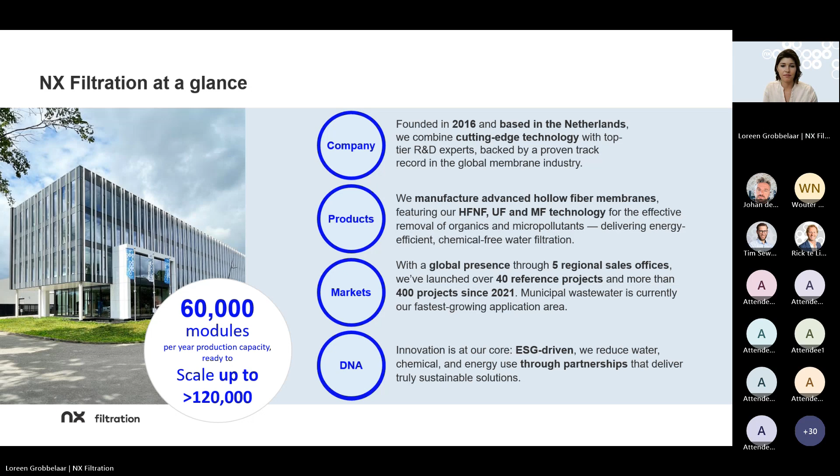Our product portfolio covers a broad range of hollow fiber membrane modules, including nanofiltration, ultrafiltration, and microfiltration. For this webinar, I'd like to highlight our ultrafiltration range, which is used in a wide range of applications, including RO pretreatment, potable water, and wastewater reuse.

Our ultrafiltration range includes the 150 kilodalton membrane, best for removal of small particles, bacteria, and viruses. We also have a tighter ultrafiltration membrane, the 10 kilodalton, best for colloidal silica removal. These membranes can replace some existing products currently in the market, but you'll hear more about this later from my colleague Rick.

Our nanofiltration membranes range between 400 and 800 Dalton molecular weight cutoff, and we operate these membranes between 12 and 35 LMH, dependent on the water source. These nanofiltration membranes are specifically designed to remove organics, color, and COD from the water, without the need for chemical dosing.

And finally, our microfiltration range is mostly used in the food and beverage industry and is ideally suited for high quality clarification of beverages, and is also used in the dairy and pharmaceutical industry.

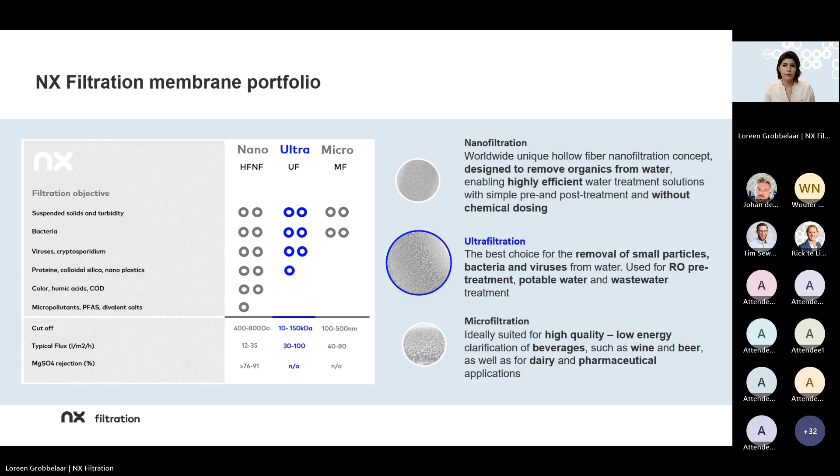Now that you've seen our product portfolio, you can see that we've served many projects globally with our ultrafiltration membranes, including presence in both municipal and industrial markets. This is where I'll hand over to my colleague Rick, who will tell you more about our ultrafiltration product portfolio and why you should consider replacing your membranes with NX Filtration ultrafiltration membranes.

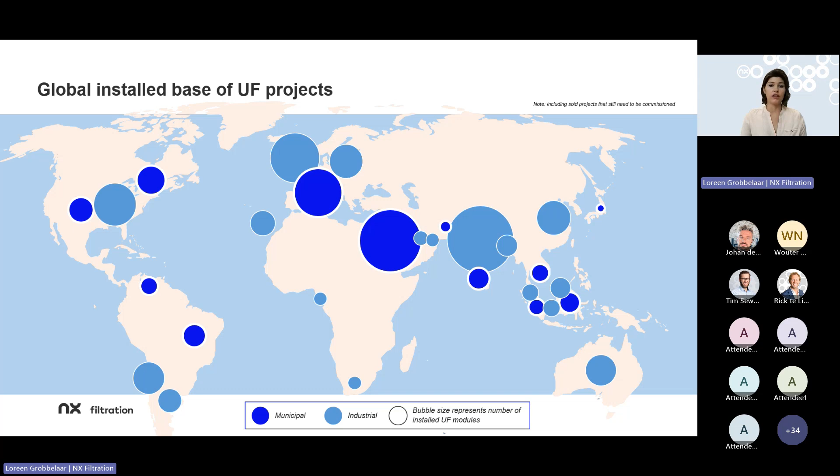Over to you, Rick. When customers start thinking about membrane replacement, it's rarely just because the old membranes have reached the end of their life. There are several strategic and operational drivers behind this decision, and it's important to understand them, especially when positioning our technology as a valuable upgrade. First, aging of the membranes, which results in performance degradation.

This is a common trigger: lower flux, more frequent cleaning cycles, or declining product quality. But more and more customers are focusing on operational cost drivers: high energy consumption, excessive chemical use, labor-intensive maintenance routines. In other words, increasing OPEX.

Then there's the regulatory and sustainability aspect. Customers are under growing pressure to meet stricter discharge limits or reduce their environmental footprint. In these cases, a membrane upgrade can contribute to ESG goals and avoid risk for regulatory and reputational exposure due

to the offering of future-proof PFAS-free membranes. Another key factor is better life cycle cost, in other words, process optimization. For example, upgrading membranes can allow for higher recovery, capacity expansion, or more stable operation under challenging feed conditions, all

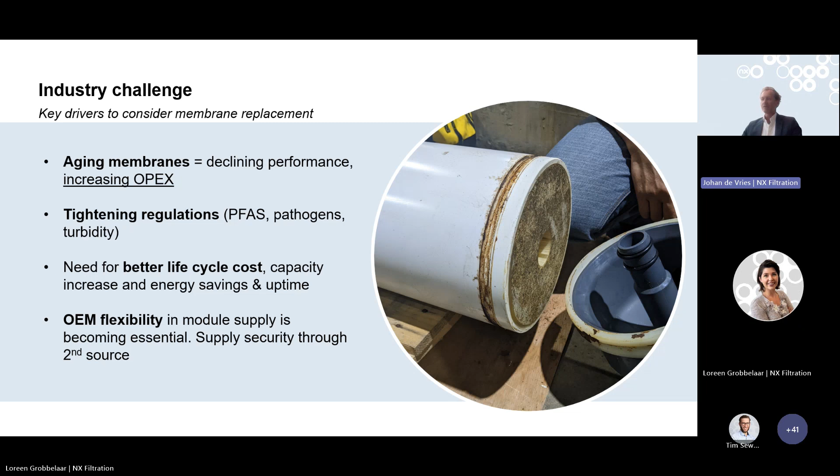without major infrastructural changes. Another critical driver is OEM flexibility and second source strategy. Many customers are looking to diversify their supply chain and reduce reliance on a single membrane vendor. By qualifying alternative suppliers, they gain resilience, all without compromising performance.

On the previous slide, we showed the key drivers to consider membrane replacements. This slide links these drivers to the NX membrane principles, namely PES, single bore, and inside-out. Our PES, polyether sulfone-based membranes, combine high performance and reliability, delivering strong flux, low fouling, and consistent pathogen removal.

And as mentioned previously, with the choice for PES, you avoid risks for regulatory and reputational exposure due to the offering of future-proof PFAS-free membranes.

Our single-bore membranes offer robust and reliable performance even in demanding conditions. They're designed for easy and effective cleaning, reducing downtime and maintenance effort. And with uncompromised integrity, they ensure long-term operational safety and consistent water quality.

In my 27-year-long membrane career, I've predominantly worked with the membrane principles mentioned on this slide, and I can assure you that PES single-bore membranes have an excellent track record and are not inferior to, for example, multi-bore membranes. Our inside-out based membranes ensure maximum fiber protection, support energy-efficient operation, and deliver long-lasting durability for lower life cycle cost and reliable performance.

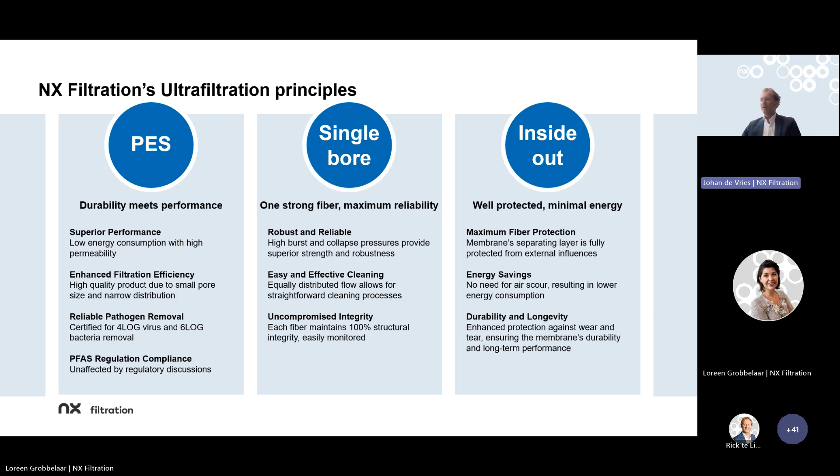I mentioned earlier the key drivers to consider membrane replacement. One of our strengths is membrane module compatibility. In many cases, our modules can replace existing systems one for one, without the need for modifications to piping or skids. This saves downtime, cost, and complexity.

Furthermore, as we adapt the existing control philosophy of the systems, the integration goes seamlessly. We have successfully replaced modules from brands such as DuPont, Inge, Pentair, Hydranautics, and others on a global scale. We therefore have a proven track record of our full-scale referencing on various applications, which confirms the performance and lifetime expectations of our membrane products.

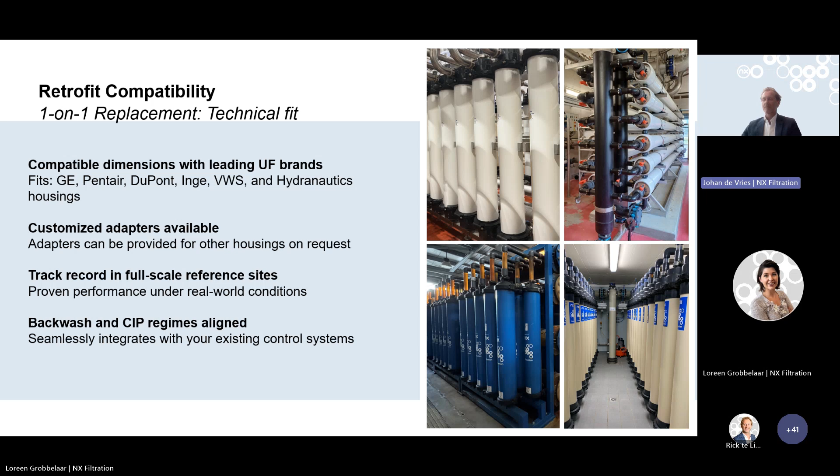Our membranes are backed by the major potable water certifications, meeting strict international standards for safe drinking water, like NSF 61, NSF 419, Dutch Kiwa, the French ACS, the German KTW, and the Chinese MOH. They provide high log removal performance, up to log 6 for bacteria and log 4 for viruses, ensuring reliable pathogen protection. Combined with a long operational lifetime, they deliver trusted long-term performance.

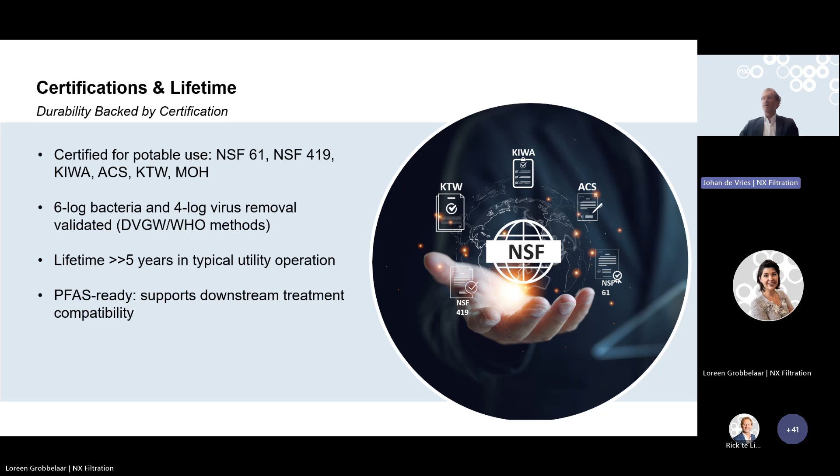Now that we have introduced the portfolio and its characteristics, we expect that you are very interested in our product range for your retrofit needs.

We have a membrane retrofit tool available in order to answer your requests for replacement in a smooth and easy way. Please contact us in case you have such question, and we will guide you through.

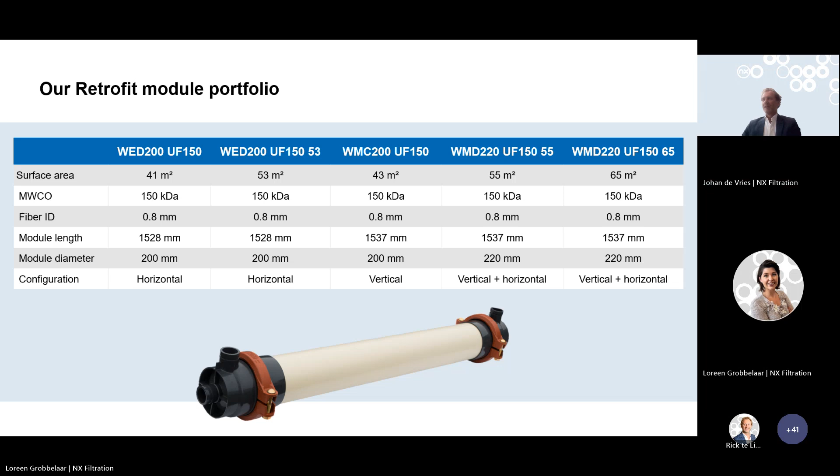Next to this retrofit program, we have the HYDRAcap series. Due to the transition of this range in October 2020 to NX, we have the full range available for your retrofit needs, avoiding system adjustments resulting in hassle-free replacement. These products are equipped with the same fiber as the retrofit module portfolio of the previous slide. But in addition, we have an LD series available, which has a larger inner diameter for the more challenging applications. However, both modules have the same 150 kilodalton molecular weight cutoff.

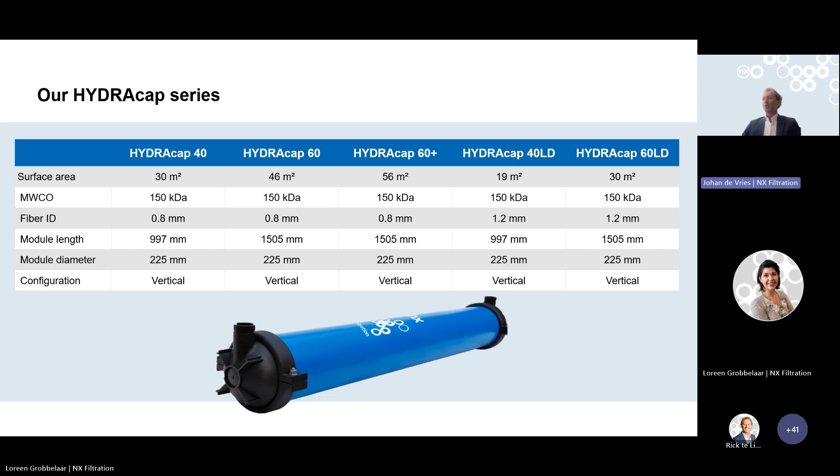The HYDRAcap range, however, is only available in a vertical configuration, as you can see on the slide.

Last but not least, we have our tight ultrafiltration portfolio. This product is mainly used for the removal of colloidal silica applications for greenfield projects, but also for the replacement of existing systems, for amongst others, Pentair and Koch. This membrane has our unique 10 kilodalton membrane and has an inner diameter of 0.7 millimeter. It's available in a 43 and a 54 square meter surface area.

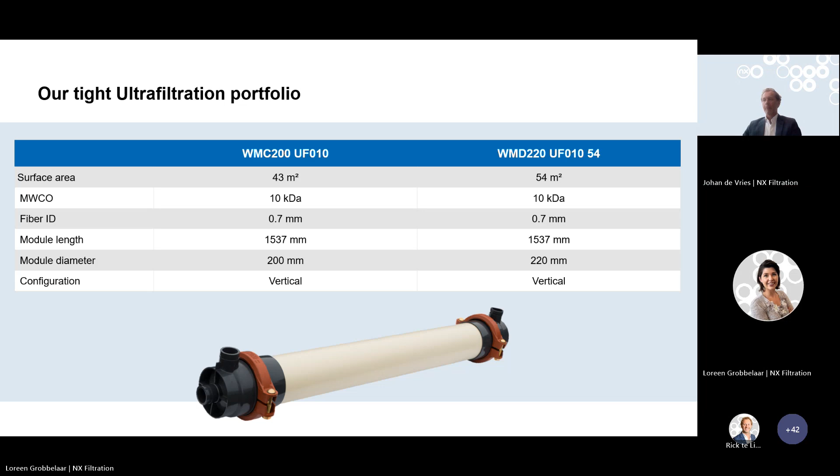Now, to bring all these declarations to life, my colleague Tim Sewerin will take you through some of the detailed case studies, which are real installations with actual data and clear before and after comparisons. So Tim, the floor is yours.

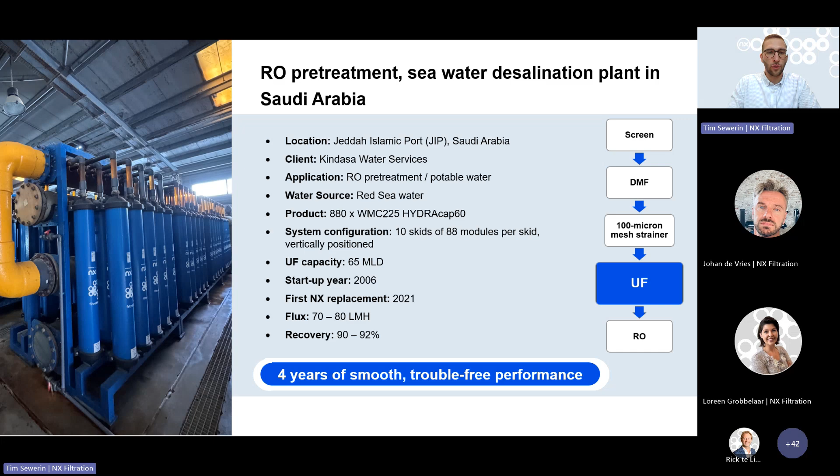So let's start directly into it, starting with a case in the Middle East in Saudi Arabia, with our partner Kindasa. It's an RO pretreatment site where we treat seawater desalination plant for potable water production, and this plant contains our well-known HYDRAcap series. It started initially in 2006 by Hydranautics, from which we took over the series, and we started our first replacements in 2021 together with the partners there. So by now the whole system has been replaced. The 880 modules have been installed with only NX membranes, and you can see on the right-hand side the treatment scheme with a flux of 70 to 80 LMH, and in total already 4 years of smooth and trouble-free performance for this site.

The next site is another RO pretreatment site, a big one, this time in India. It's seawater desalination at Tuticorin for a power plant. Instead of producing potable water, the water is used for cooling water at the power plant site. Here, our well-known HYDRAcap 60 modules were used for replacing the existing installation.

This is an initial plant started up in 2013, and we started our first replacement jobs here in 2022 with our partners in India. By now we have replaced around 75% of this installation. For such a system size, this goes typically in sequences, so you do not replace all the modules at once. We've been working with the partner here for 3 years already and are the preferred choice for replacements, including the upcoming ones in the next years. Looking forward to having 100% NX Filtration running in this system in India.

It's quite a big size of 57 MLD. The main target here is to produce water that is suitable for the RO that then does the desalination job. So SDI, turbidity removal, but also, of course, pathogens.

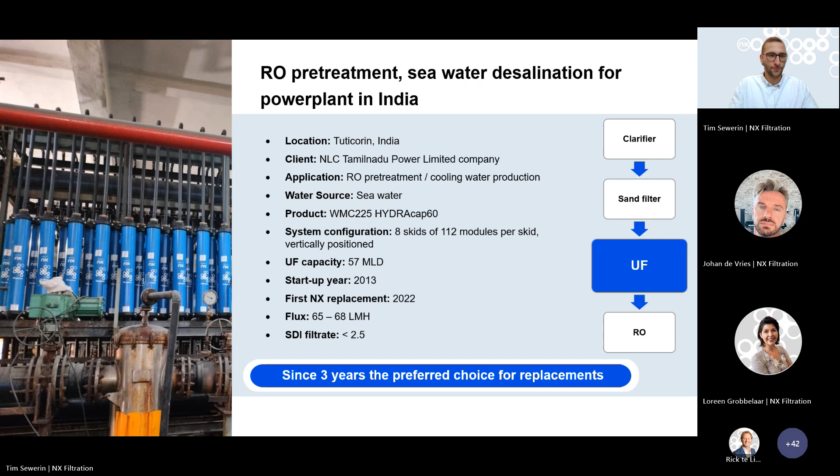Another site in India where we've recently been qualified is the Nemmeli plant in Chennai. It's originally built in 2013, a similar type of installation. This time it contains our WMD220 UF150 modules, a bit of a different configuration. As you can see, our first NX replacement is in 2025.

This year we're quite proud. It's a big size, 220 MLD, and this replacement is also running in sequences, so the first one has just been sold. We are the trusted partner for this recent replacement, and we hope more are to come. We are very happy with this big reference, having been selected by our partner Wabag to be the membrane supplier of choice, because that gives us the trust that people trust our products, know the performance, and that they are reliable and last long in the market.

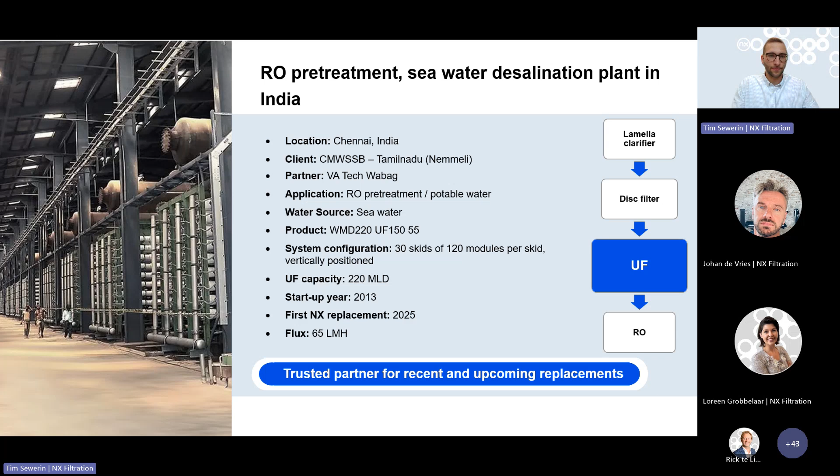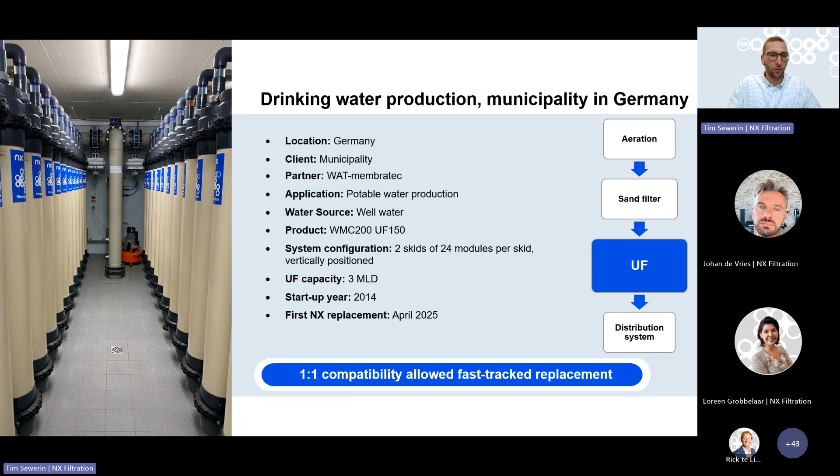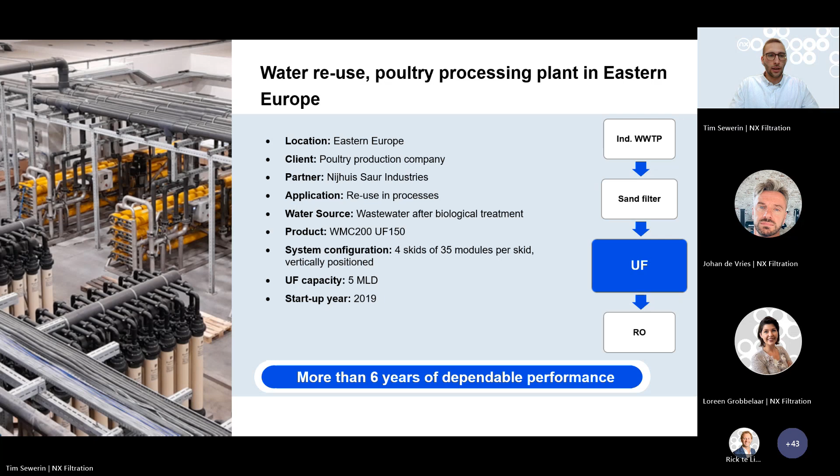Now that we've spent a few words on the different cases we have in different applications like seawater desalination, RO pretreatment, municipal wastewater and so on, we'd like to do a deep dive into a success story - the UF replacement we've currently done in Saint-Pois, together with our partner SAUR in France, which is a nice example of how such a replacement can work out. Here's a site overview. The plant is located in France, in Saint-Pois, the city name.

With our partner SAUR, we work together on this drinking water plant which produces water from surface water. On the right-hand side, you can see the rough treatment scheme with pre-treatment of coagulation, flocculation, the carboflux technology, and the sand filter. The UF is in place here mainly for virus and bacteria pathogen control, as the ultimate barrier for disinfection, and to remove residual turbidity and TSS that may pass the sand filter.

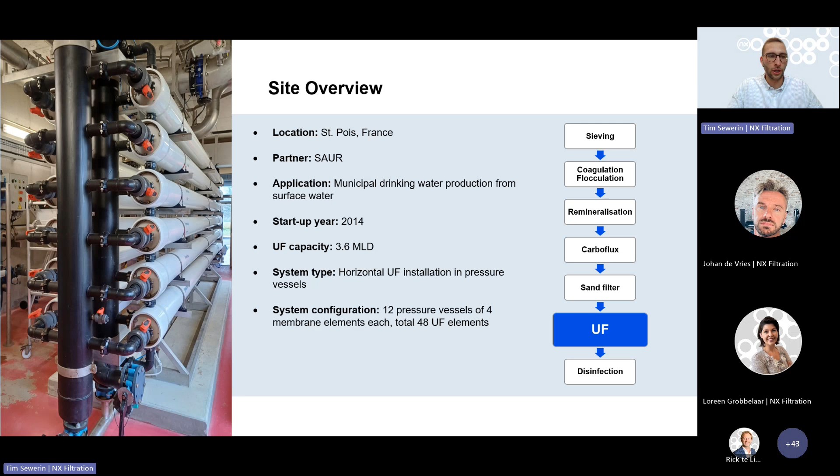This system is a horizontally configured installation, with UF modules in pressure vessels. In total, there are 4 elements in one vessel, so we have a total installation of 48 elements, 3.6 MLD. The plant was started up in 2014, so by now 11 years, which is also a nice bridge to why replace now.

So what convinced SAUR to choose NX Filtration and replace its membranes in the system? The membranes have been running for more than 10 years already, and there was a replacement included in their long-term service contract for the site. So replacement was at some point inevitable.

We offered them a nice, budget-efficient replacement with a well-planned structure behind it, which was a nice package that convinced SAUR. Next to that, they could save costs, which they can redirect into other parts of the plant that they also need to maintain under the service contract. On the same side, we also made a deal to have a support package of 2 years for performance monitoring that helps to optimize the plant further and even improve their operation.

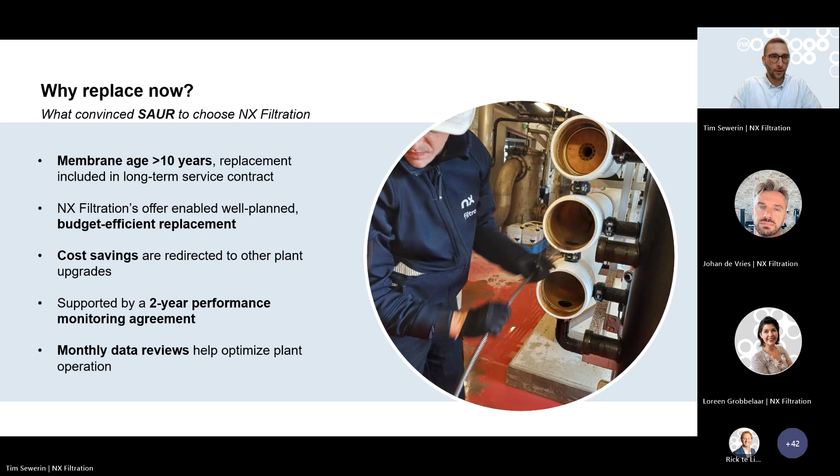So how did this replacement go? Here's a timeline: we started the discussion a year ago in March. Our local team in France, Rick, said we have local presences all around the world, which is helpful for these things. So we had a local team directly in contact with SAUR, and based on the discussions, compatibility was confirmed, and also the performance discussions about what the membrane shall fulfill and what we had to prove were held.

We got positive feedback, and in December we received the order from SAUR for the replacement, agreeing on commercial terms, which was also a fast replacement scheme. Not 2 months later, we had a joint site visit. The NX team, together with the SAUR people, visited the site and had a pre-visit preparation meeting to check out all the site conditions to make the replacement smooth and without any interruptions.

And then in March already, we had the replacement done. It was a very smooth module exchange, lasting less than 3 days because of the well-prepared site by SAUR. They are very experienced with replacing membranes, so all in all there was a superb job done by everyone involved. Then we had a seamless start to water production. All in all, this took less than a year from the first discussions to the order received to the membrane replacement, which is also a nice feature we can offer - that we can ship fast and help support you quite on time with your replacement if needed.

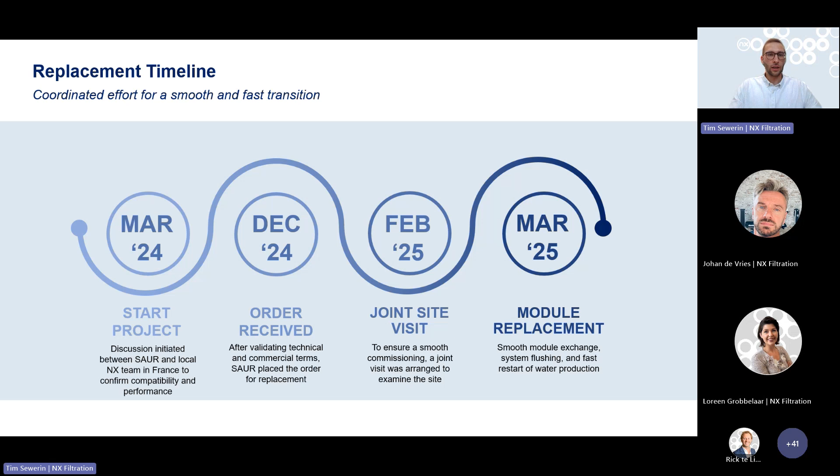Here's a little visual of the execution at a glance, pictures taken from before and after. Opening the vessels, you can see on top the old installed membrane that has seen quite some years of operation and quite some water, some pollution. On the bottom side, you can see the freshly installed NX Filtration membrane in the vessel. Not only were the modules replaced, but also the old vessels were cleaned and seals were exchanged, which restored the integrity of the whole system. All in all, a nice replacement job that refurbished the system to make it ready for the future, to run a lot of years now with our membranes again.

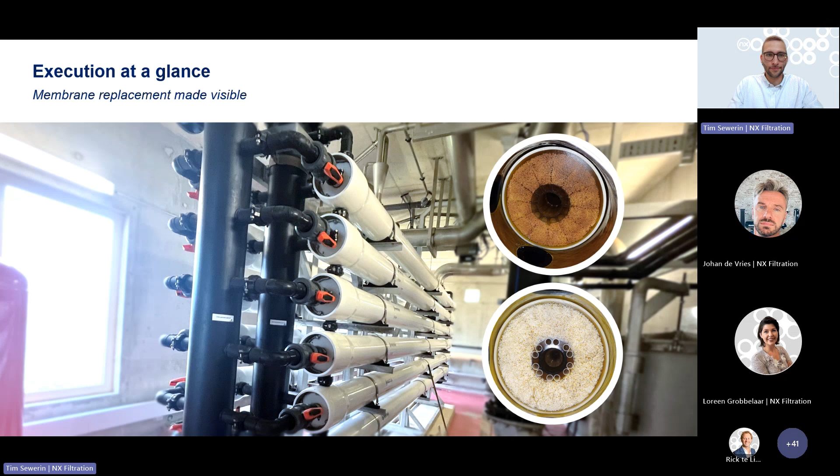You see here that not only did we replace it smoothly, but part of this contract was also a performance operation review. On the left-hand side you see our turbidity removal - in green, the filtrate side, all below 0.05 NTU turbidity, showing reliable turbidity removal, which is what the membrane should do. Permeability is also stable, and we are tracking this onward. This is now the first 2 months since we replaced in March, and we're happy to collect more data and build long-term trends of this installation together with SAUR, working on the collaboration and extending this partnership and review for this plant.

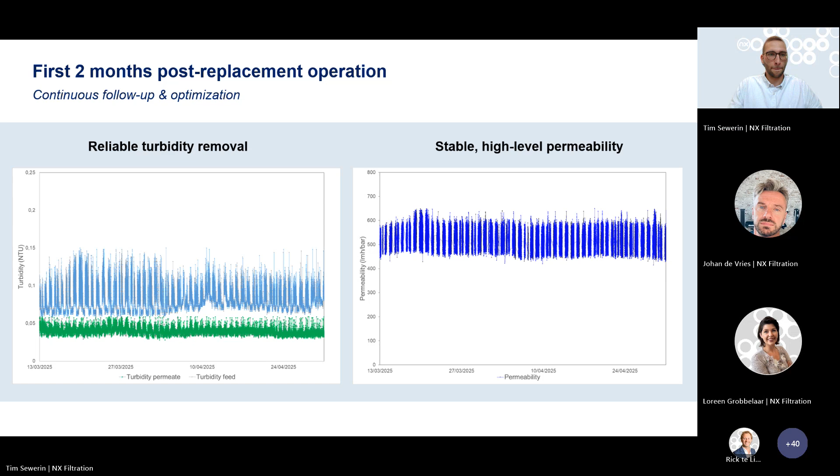Concluding this, we can say that the Saint-Pois replacement was really a model for future replacements. We had a fast and well-prepared execution. The SAUR team did a superb job on site, having all the equipment ready. The plan was there, and the personnel also.

In less than 3 days, the whole rack was uninstalled, cleaned, then reinstalled with the new membranes, flushed, integrity tested, and up and running. There was high confidence in the performance, and we had a smooth restart because of the thorough preparation, which paid off. Now we also have the add-on where we can follow up and optimize the plant further with our partner.

We really saw that early engagement paid off. A site visit really helps prevent any unforeseen issues. We made it possible to have a low disruptive replacement, basically on the run, and now a strong collaboration where we provide support before, during, and after the replacement. This is important for us, not just to have a client for one installation, but to keep the conversation going and maintain the relationship for future plant upgrades or replacements.

So that was a short view on our different replacement references so far, a short snapshot of what we've done in different applications, a bit of a deep dive and some best practices on how a replacement can go. Maybe we can also hear a bit from you.

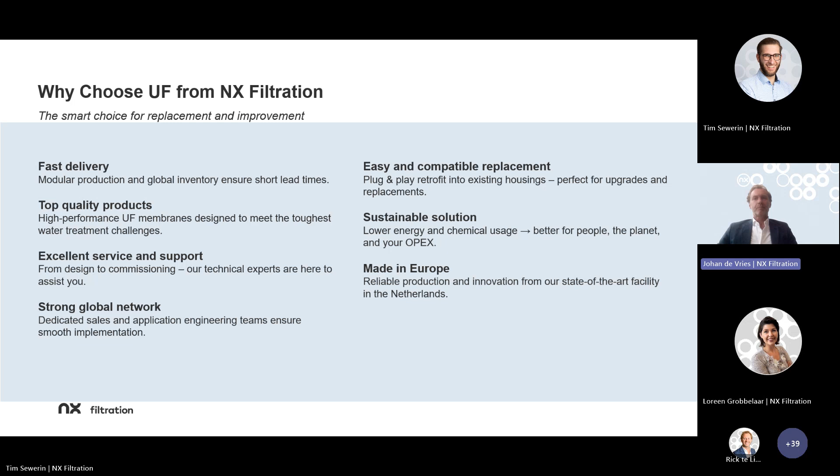So now that we have gone through the slides, we want to focus on the questions. A lot of questions came in, and I've already published some.

So what do you think is the current trend of PFAS-free UF membranes? Is it going to impact membrane availability in the future? That's an interesting question. What we do know is there is a lot of talk ongoing about PFAS-free UF membranes, and we know that our PES-based membranes are ready for the future. So whatever the decision will be, if you have a long-term investment in your system, or your customer has a long-term investment in a water treatment plant, I would reconsider which product should be used in order to avoid future constraints. That's my answer on that question.

How fast can you deliver? I think I already mentioned that - we deliver off the shelf. We have big customers, as Tim already showed, large plants globally trusting our technology, and if any hiccups happen with these membranes, they need very low downtime, and we can deliver to these customers very fast. But it also means for you as a potential new customer, we can deliver very fast for your replacement or your greenfield projects.